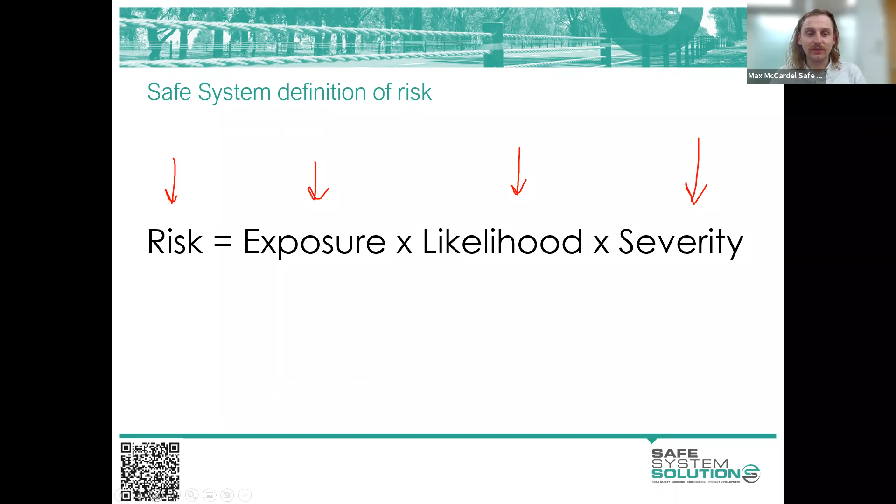And also the geometry, which Rosie touched on before, where if it's like a T intersection like that, that is not a favorable crash angle, where it's straight into a passenger side or a driver side door. If we're able to make that a more acute angle and get crashes that kind of glance off each other, that would reduce the severity. We've got a few slides here just to run through those different categories. So on the left-hand side, we just got those categories in place.

The first one that we're mentioning here is our exposure to crashes. And in this example here, what we actually have is a road closure. It's a little bit difficult to see, but there's a mound of dirt or earth that has just been placed in the middle of the road, which is obviously stopping any through traffic through that location. Further along there, there's an intersection. So it's removing the exposure at that intersection because there's no longer any traffic at that intersection. It's only one way now. Another example of this type of exposure would be creating a cul-de-sac. So actually terminating a leg before it gets to an intersection, therefore removing that exposure.

Another good example of exposure in the real world or in practice is providing grade separation. So in this example, we have a motorway and an elevated structure. So that's where all your trucks and buses and general traffic are situated. And there's no pedestrian or cyclist facilities. Instead, they have provided an alternative route, which is grade separated, so completely protected and away from general traffic.

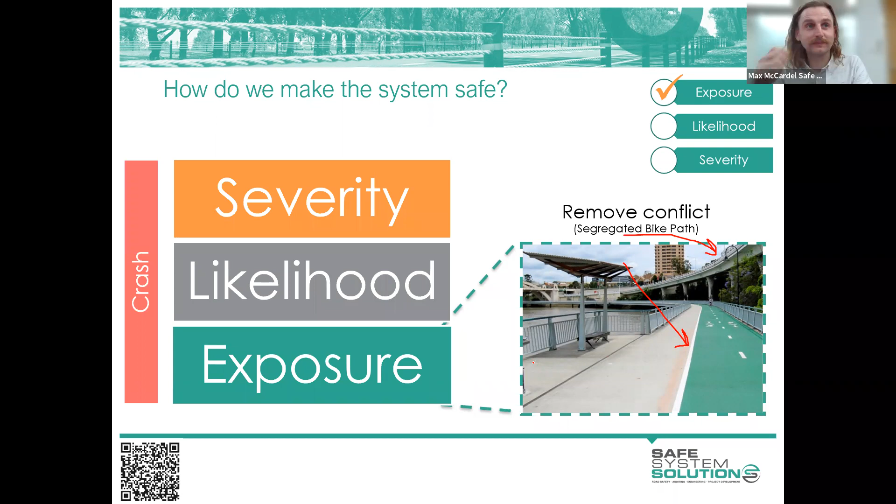While we're on exposure, this is just the definition provided within the Austroads guide. So exposure refers to which road users in what numbers are using the road and thus exposed to a potential crash. I don't know why they make these things so long worded, but measures of exposure include AADT, side road traffic volumes, number of motorcycles, cyclists, pedestrians crossing or walking along the road.

In layman's terms, it's just the units of whichever mode you're looking at there are within a day or within an hour or whatever measure that you're using. So all you're focused on with exposure is volumes, so traffic volumes. Okay?

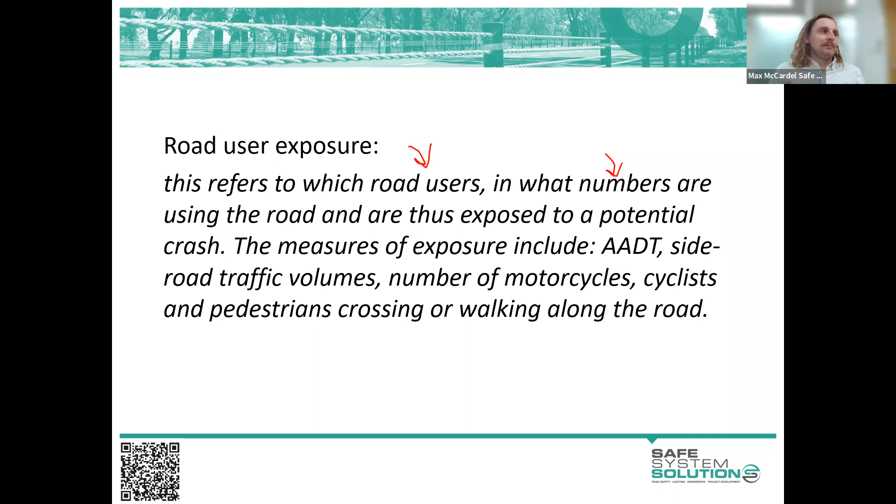Because the Safe System Assessment Framework is relatively new, like it's still being embedded in our various jurisdictions, you will find through application that there are some little intricacies or just some pain points, I suppose you could say, ways that the framework could be interpreted in a few different ways.

Invariably, you'll come across some of these issues, and the guidelines don't necessarily prescribe how to approach that issue. These fact sheets would be a very useful resource for you. So we've provided a link within our learning management system to these fact sheets. So we recommend just downloading them and keeping them until you need them. Particularly with the last assignment that you do, where you will be doing a bit of a mock SSA, these fact sheets may come in handy there.

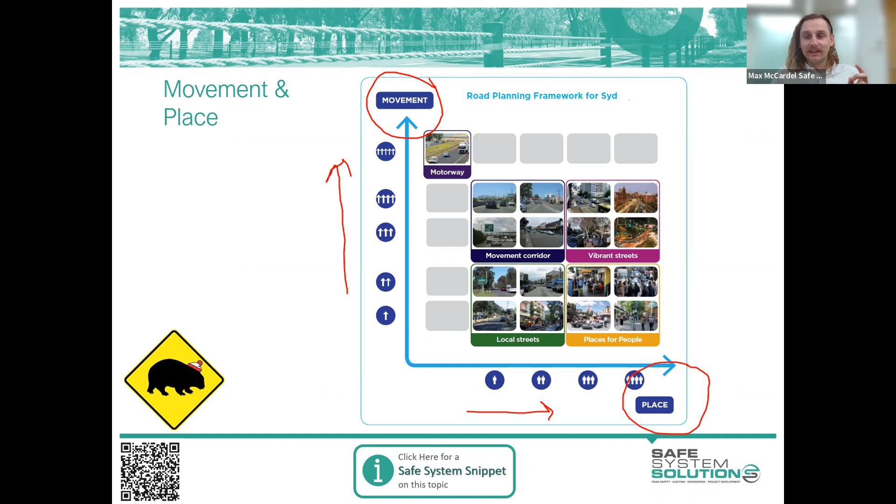So perhaps the clearest one in this entire matrix is where you have no place function and it's all about the movement, is a motorway. Because you don't want people stopping and spending time there and dwelling. That's not the purpose of that road at all. It is solely to get traffic moving. So that one's probably the clearest little classification within this framework, but we'll also look at the other ones, which can get a little bit more open to interpretation and a little bit more challenging to work within.

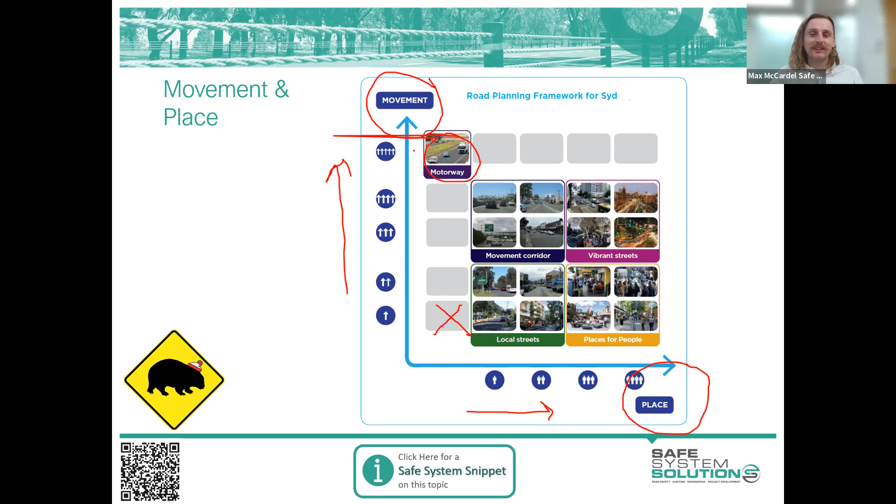So first one we'll get stuck into is this idea of places for people. So this is an area, this is the bottom right hand, where we acknowledge that, okay, the community really valued this place as somewhere that's important to them. Most likely it's going to be CBD districts or high streets, areas where there's lots of pedestrian generators or attractions and things like that. Could be adjacent a railway station, for instance.

And within that same thinking, it serves a low movement function, or rather it's been strategically analyzed as it doesn't need to serve a massive movement function. Maybe that's a better way to phrase it.

So in this space here, we've got lots of place value, not a lot of movement value. And here's an example of what this could look like in the real world, where this is actually a carriageway, but it's a shared area. So pedestrians actually have priority across there. The speed would be 10 kilometers per hour.

And you can tell if you were driving through there, it doesn't feel like that is really a space for vehicles. It doesn't feel like you have the priority within there, which is exactly what you want to communicate. And that's kind of achieved by the use of planter boxes and streetscaping and narrowing the environments and things like that. So there's a whole range of treatments, which we will get into.

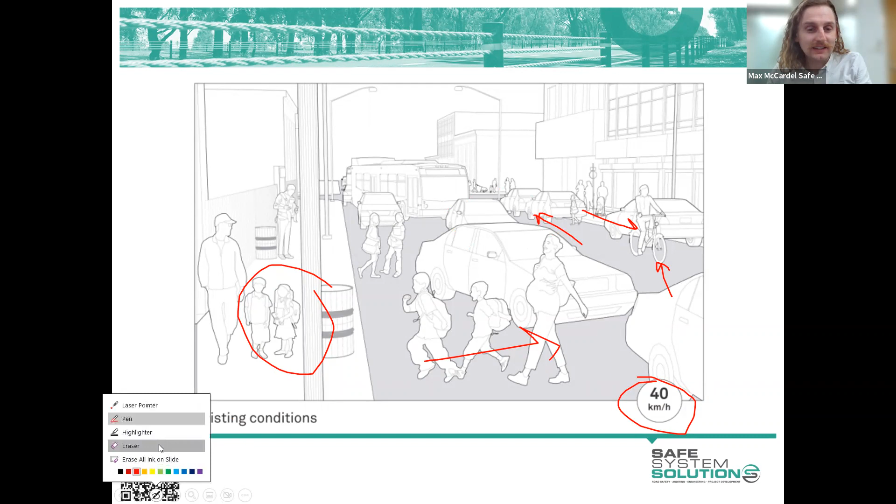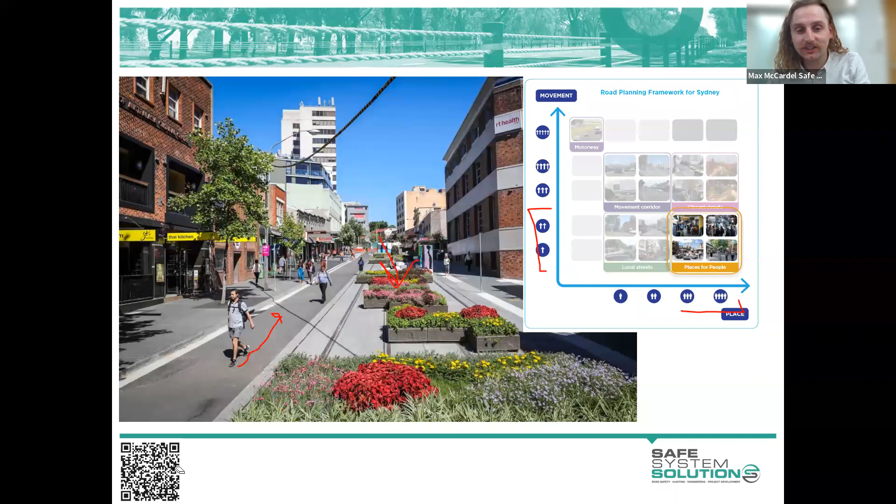And if we wanted to move this existing layout into something that more meets a places for people classification, what type of treatments do you think we could install to achieve that? So before you pop anything in the chat, what I'm after is if you could write in the chat a recommendation or an infrastructure treatment that would make this look more like a place for people, and in brackets, write down whether that would influence the exposure, the likelihood, or the severity. So you should have your treatment, and then in brackets, either an E, an L, or an S. And it could be multiple. It could be L and S, for example.

But I'll spend, let's just say, 3 minutes on this little activity here and give you a go and see what ideas you come up with to make this a more people-friendly place for people.

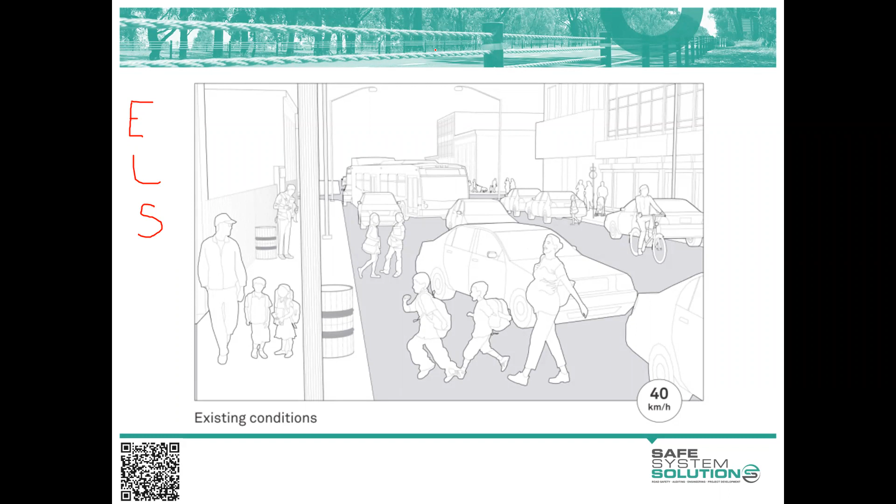All right. I'm seeing lots and lots of wonderful suggestions, so feel free to keep typing them in as I just pick out a few. There's lots of different answers here. First one that caught my eye was very open and just saying reduce vehicle volume with an E. And we give out a prize to Greg there, because I completely agree with that. If we are reducing traffic volumes, we are influencing exposure. So that's bang on. It's 100%.

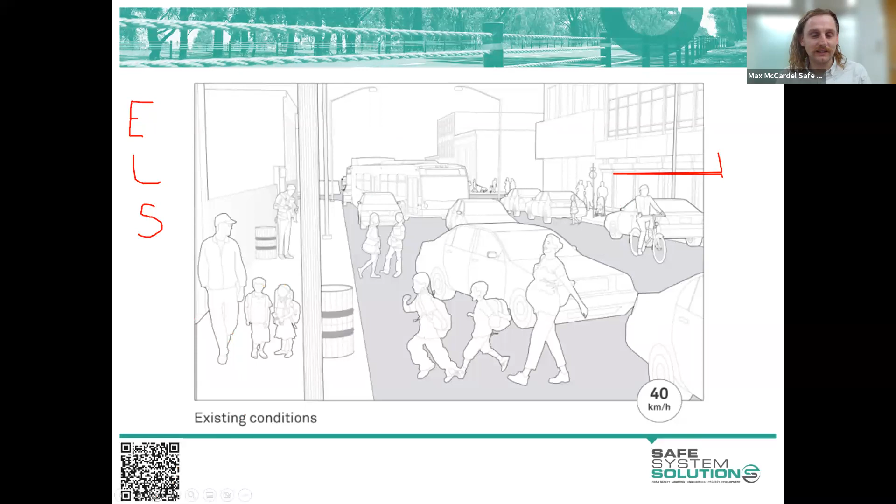The other interesting thing within that space is, that was quite vague as to how you would reduce traffic volume, but I'm just going to take it a step further and say we're going to make this a one-way road instead of two-way. Surely that's going to halve the volumes. And I don't know why the pen does that. Hopefully I can draw this out without it getting too upset at me. Let's say that this was like a block. And previously this used to be two-way, but I'm going to make it one-way.

And if we were just analyzing this road or this site in particular, and we just looked at the exposure, it'd be probably fair to assume that we are going to reduce exposure. We're going to reduce the amount of traffic traveling through there because we haven't got two traffic flows anymore. We've only got one direction. The little caveat I'll say there is it's very likely that you are just pushing the problem elsewhere. So maybe that means more vehicles are using the alternative route, which is adjacent. So maybe there's going to be an induced demand in the next block over, which maybe cannot cater for that extra traffic or doesn't have treatments to support that extra traffic flow.

Which gets into an interesting topic, because in a safe system assessment, when you define your scope, you're saying, I'm only focused on this street here, so this is what I'm worried about. I'm only worried about exposure, likelihood, severity for this street, because that's what I've been tasked with. Within a safe system assessment, it's probably fair to do that with the acknowledgement that you would have to do further investigation to see how that would impact other aspects of the network. Because there's a very real chance that this could have poor safety outcomes for the adjacent block.

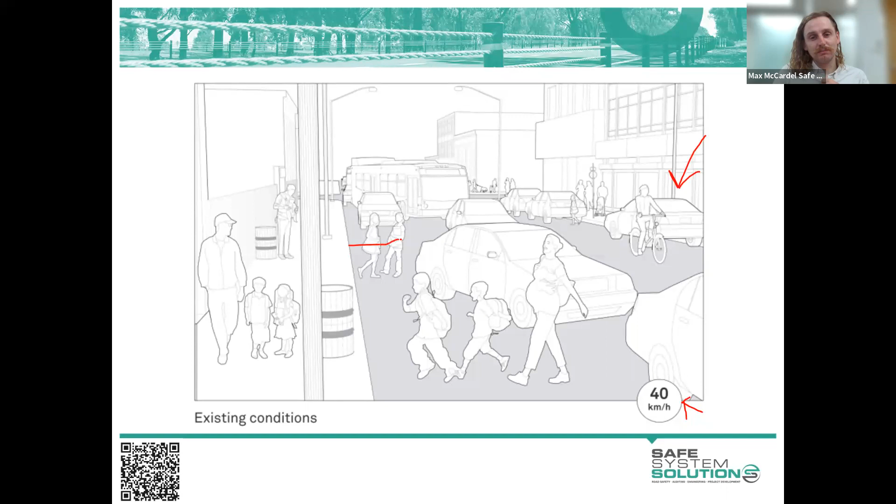And changing parking lanes instead of traffic lanes. Okay, so there's a parking lane on this side. Changing it to a parking lane. Okay, so installing a parking lane, reducing the amount of traffic lanes within that space there. Yeah, I wouldn't refer that to an exposure, because you've probably still got the same amount of vehicles, depending, I guess, how many. I guess if I meant change the entire road to a parking area. Okay, thank you for clarifying. Yeah, certainly. Yep, that would influence exposure then, because it's unlikely you'd have that same throughput of traffic if it just became one giant parking area. I'm not sure you would have hit the criteria for making it a place for people though, if it was just lots and lots of cars here. But theoretically, I understand where you're coming from there.

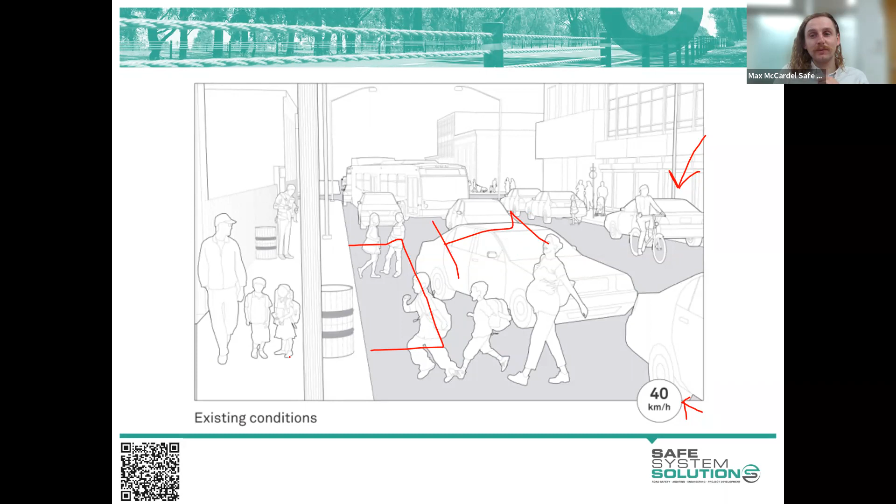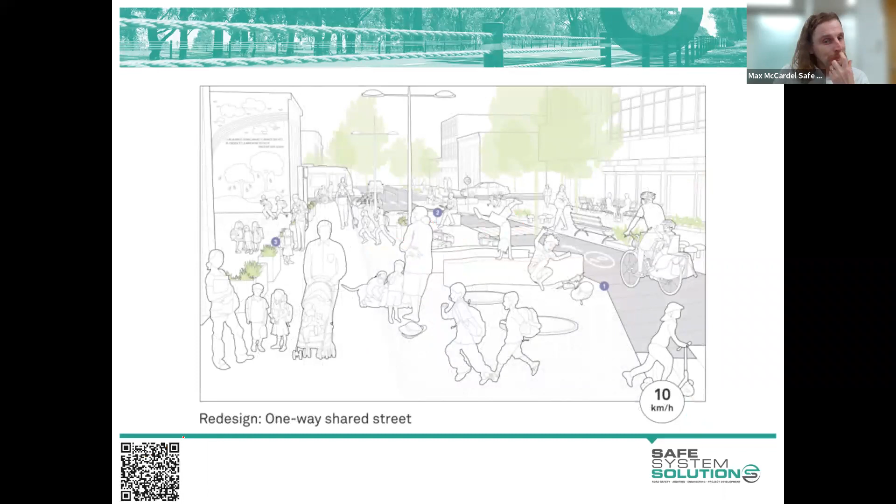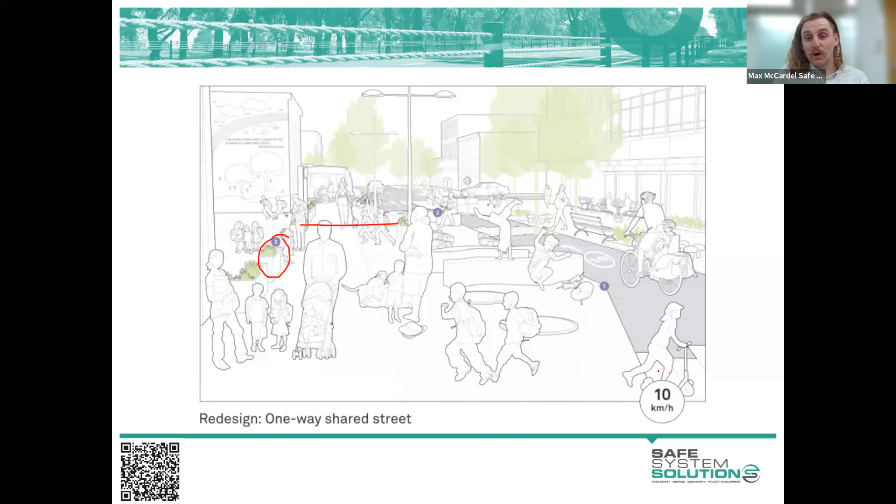But I'll show you an illustration of how this could look if we were to redesign this environment. This one in particular is looking at it more from a pedestrian and cyclist safety perspective. So you can see a lot of those treatments that you touched on, like wide footpaths, have been implemented, streetscaping improvements, lower speed. This has also been redesigned as a one-way shared street.

Another interesting thing, or kind of a bugbear, I suppose: if this was a shared street, what that actually means is pedestrians have priority. That's what the shared entails. So it's no longer just the carriageway belongs to general traffic. Pedestrians and people crossing have the priority at all instances within that shared zone, that shared area.

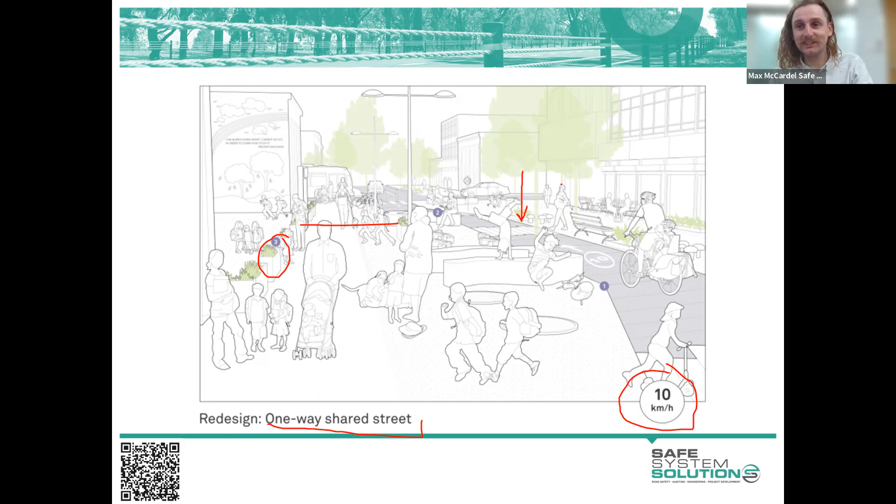So the need to install, a little bit difficult to see, a zebra crossing there is actually redundant, because pedestrians can cross anywhere with priority. They don't need that. This is the spot where you have priority. Anywhere along there would be classified as priority, but that's just a minor bugbear, I suppose.

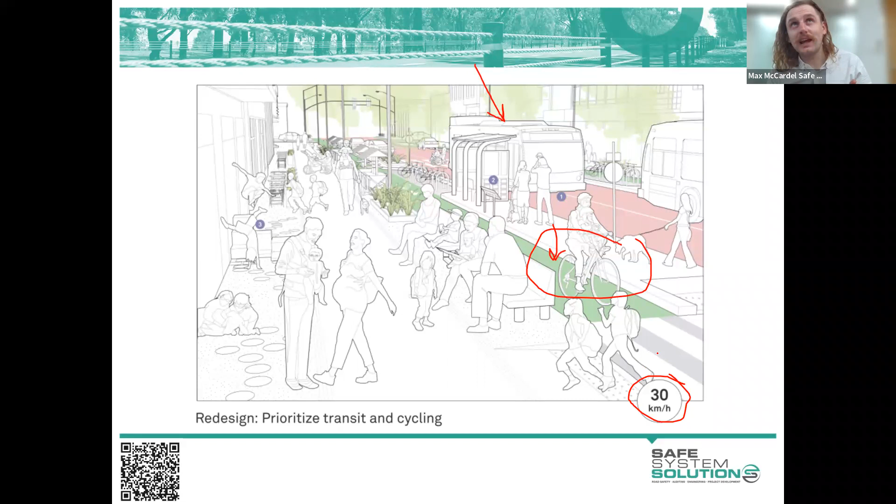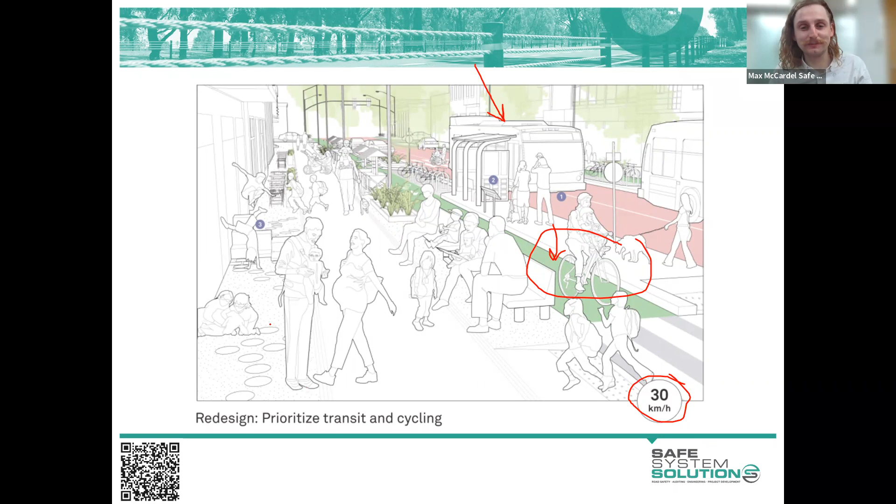In this example, where we actually have bus lanes, very heavy vehicles, we're advocating for separated bicycle lanes. It is at a 30 kilometer per hour mark. 30 is generally accepted as appropriate for cyclists to share the road through the use of sharrows, which we will hop into a little bit later. So it's possible that they could have shared the traffic lane there. However, if there was carriageway width available, we'd certainly be advocating for separated facilities just to further reduce that risk of any collision.

We've got a similar exercise now with another classification within the movement and place framework. This one is local streets. So once again, we don't really have a high movement function. It's not incredibly important that traffic flows remain undisturbed. Similarly, it doesn't hold a lot of place value, and people can get quite upset when you say that their local street doesn't have a lot of place value, but this framework is meant to be interpreted at a statewide level or at a more global level.

So if you think of what a high place function area would be, it's where people congregate in the most mass, which would be your high streets, CBDs, those types of areas. So not really your local streets. Although they might have personal, sentimental place value, as a community as a whole, it's unlikely that our local streets serve that function. So just a heads up there if you ever get in that conversation with anyone from the community.

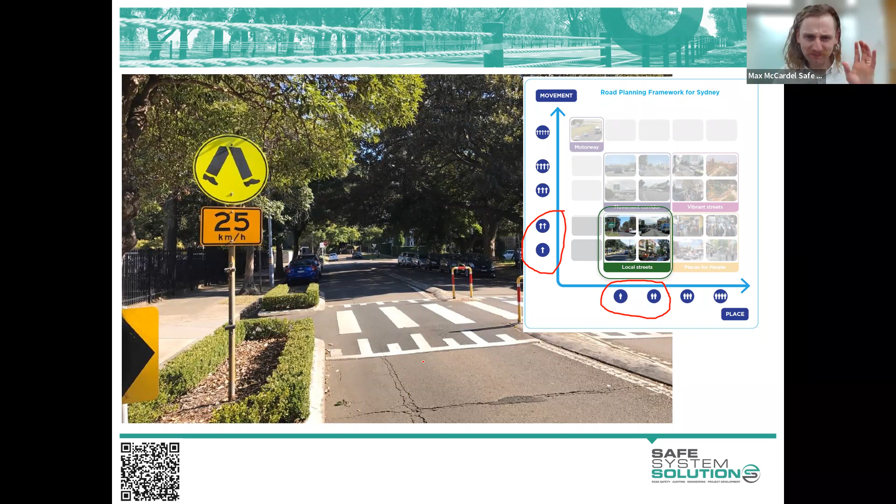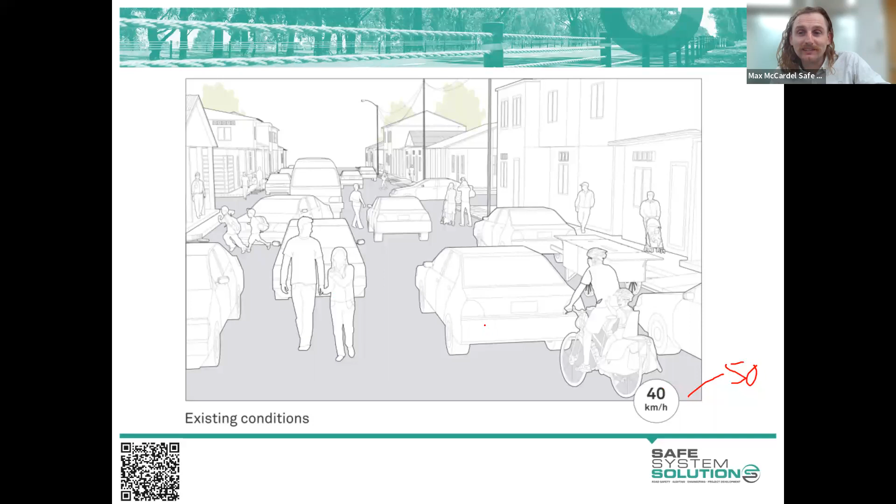But similar exercise: I'll show you a little artist rendition of a pretty common residential street, which would most likely be at 50 kilometers per hour because the urban default would apply. This could be any residential area that you've visited. Generally, this would be the layout. You'd have parking on the sides, a two-way lane arrangement, so one lane each way. Once again, put into the chat any treatment recommendations, with a bracket afterwards to say whether that would influence exposure, likelihood, or severity.

This time I'll give you 5 minutes. My clock says 11:31 is when we'll be back, because I'll give you a chance to have a stretch, maybe grab a cup of tea or whatever. And at the end of the break, we'll get stuck into some of those treatment options.

Welcome back, everyone. Hopefully you managed to get a stretch in. I know I did. Yeah, lots of good responses coming through again. I might just pick out a few, just like I did last time, and have a chat through, but feel free to keep them coming as I'm talking.

So marking a separated bicycle lane is a very interesting one. I've got a slide later on which will perhaps make it clearer, but to me, it reduces the likelihood because you've got separate facilities: a bicycle lane, separation, and then a traffic lane. But I wouldn't say it influences exposure, because only if it's completely off-road and there's never any conflict, which is pretty rare, could you say it influences exposure.

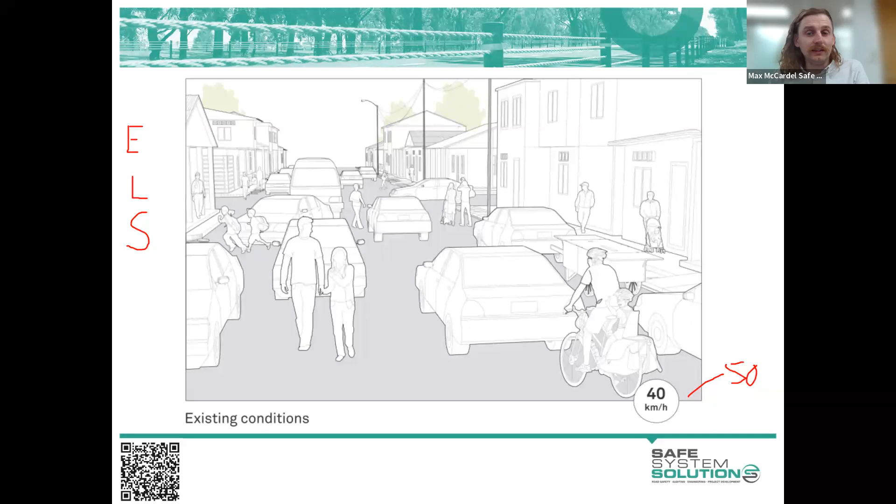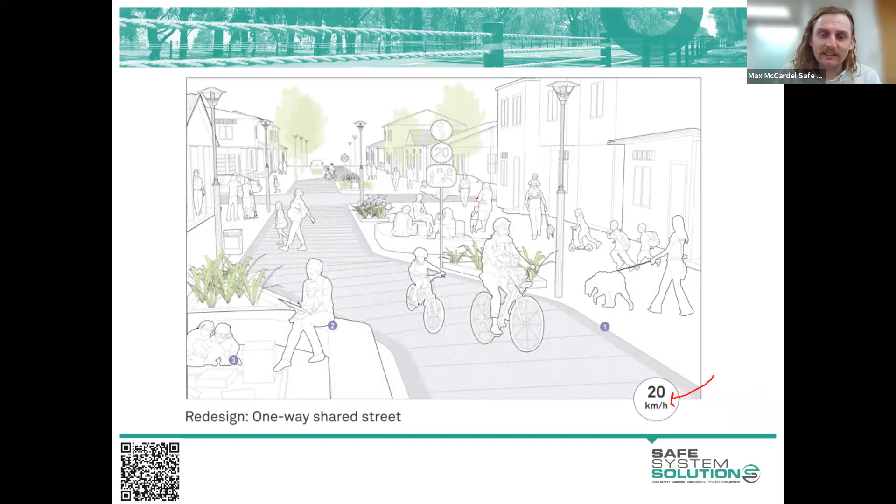So here's just a rendition of how the artists saw this future environment. So you can see they have gone with a one-way shared street. They've also gone for a lower speed zone, 20 kilometers per hour. Another interesting thing about this is, so you've got this geometry change, which was also mentioned, but you can kind of see that horizontal deflection. That's likely going to do a pretty good job at slowing down traffic because they have to slow down to swerve to make that maneuver.

Horizontal geometry is not all that common. We tend to go for vertical geometry within local streets through speed humps. Even in the Miller Street example that we looked at the start, that was through vertical geometry. But this idea of making it a little bit more inconvenient for traffic to get through there is a good way to slow down traffic.

Another interesting thing, because this is in a 20 kilometer per hour zone, the idea that cyclists share the road is generally accepted. So if that was a 40 kilometers, for instance, we'd look at separating those two road users, but because it is lower speeds, that idea of sharing the roadway is deemed acceptable. What else have we got here? Yeah, wider footpaths. We've got things like benches, you know, for streetscaping, more gardening opportunities.

The intersection to me still looks a little bit ill-defined. So that suggestion of a compact roundabout would probably fit in well there, or just any roundabout would probably work within there in that space. But yeah, really good suggestions that have come through. And you can see how all the ideas that you've generated more or less do get captured within these artistic renditions. So you've all got the thinking there. The most critical skill that we're trying to get out of this exercise is the categorization into exposure, likelihood, severity, which we're doing a very good job of as well.

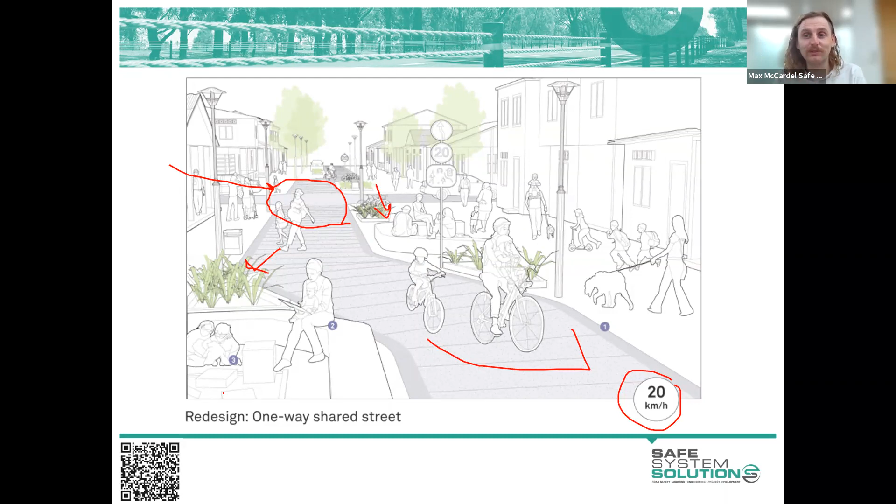So we do have one more of these examples. This last one we might go through a little bit quicker. But it is a very challenging example. So we're still within that space of, I'll show you an artistic rendition and we'll see what treatments we can apply within this. But the strategic background that I'm giving you for this one is, I'm telling you this is very important to keep people moving through here. So we need to get people moved through here.

But it's also a place where people want to hang out. So there could be bars and clubs and, you know, a local footy pitch or something like that along here where people want to dwell and spend time. So we've got those two strong objectives that sometimes work in the opposing direction, but we need to try and work out a solution within this space. Not going to lie, very difficult, very, very challenging.

Sorry, Max, just a quick question in the chat. Yeah. From Ash, when turning a street into a one-way street, does the cost of moving a whole channel of traffic to a new place outweigh the value of the redesign?

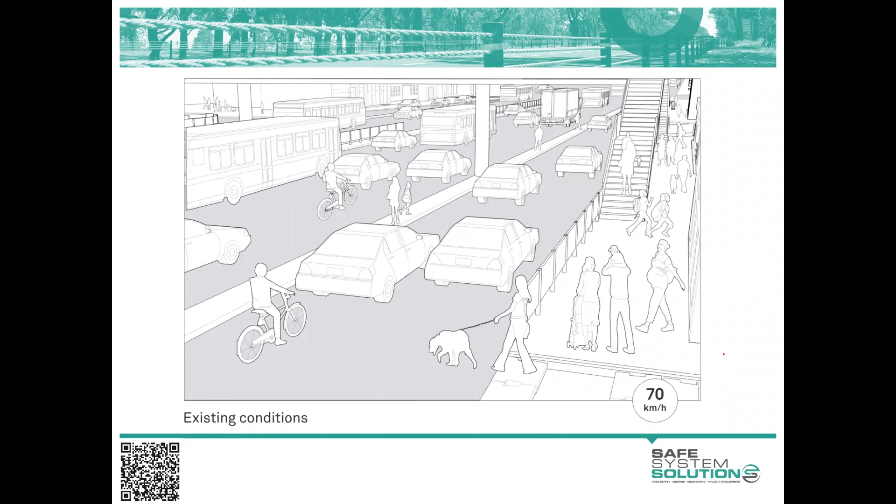Valid question. It would certainly be dependent on the network that you're looking at, project by project, exactly how that would look. The reason I say that is if you were to do that in the residential streets that we looked at before, and there was absolutely no context, it was just a random local street that didn't really connect anywhere, the community would just be like, why was this done here? What's going on? And it's unlikely that that would achieve the benefits that you're after.

However, if there was a strategic reason, so for instance, if north of that road there was a shared area, like a mall, and south of that road there was a train station, and that was one corridor that, although it was a local street, lots and lots of pedestrians and cyclists used to get into the town CBD, you'd have a much better chance of getting that BCR, or benefit cost ratio, above whatever you need it to be in that circumstance, because it actually provides strategic value to reduce speeds there, make it a low-speed zone, and invest money in infrastructure, because our objectives are no longer to support through traffic in both directions. It's more about creating that place for people.

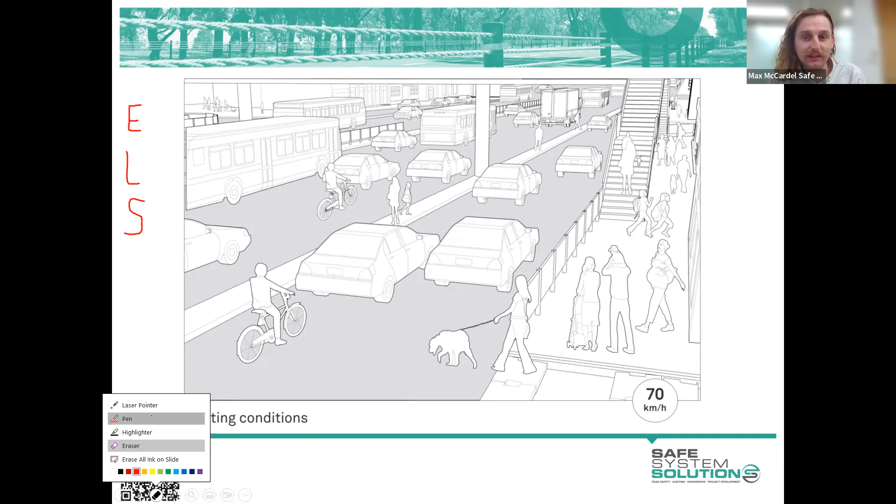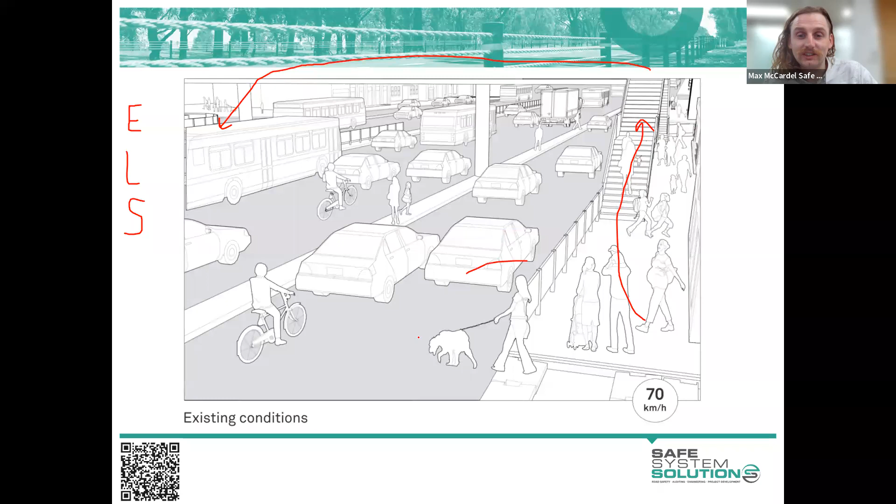Getting lots of suggestions about the pedestrian overpass, which I'm glad people are bringing up because I've got some thoughts on it. In principle, it's a great solution because we're achieving grade separation, so we're influencing exposure. If we're getting pedestrians up here, crossing over the road and coming back down the other side, they don't have to interact with traffic. Perfect. Unfortunately, the practical world does not work as we often hope or imagine. Even in this illustration, you can see a person deciding to cross over there with their dog and people waiting in the middle of these islands to cross the carriageway.

And I think that's something we really need to acknowledge whenever we're doing overpasses, particularly where you've got strong pedestrian demand, like these environments. It's virtually impossible to match the desire lines everywhere along this strip, because there's a whole raft of opportunities where people may want to be crossing. Even if it's 10 meters out of their way to go to the stairs, they may not be bothered. They also may not be bothered to walk up or down the stairs, or they may be physically unable to do that.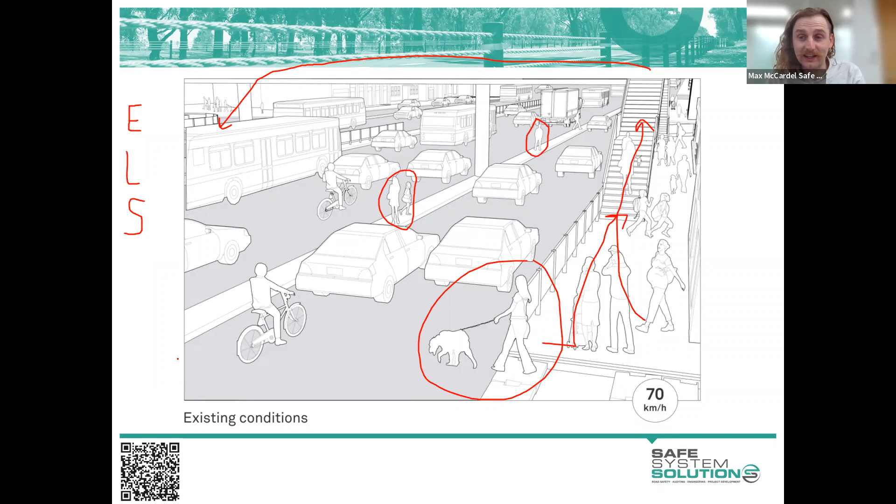They may not want to. You know, there's accessibility issues and concerns that you need to think about as well. So I'm not trying to say that we should never do overpasses. They're wonderful things, but particularly within these urban environments, we just need to acknowledge that a lot of the pedestrian demand will still be to take their chances and just cross over this carriageway.

And some of you may have already made a note about, well, there are these pedestrian fences, and there's also some at the back here, to try and reduce that as a risk. So not to encourage pedestrians crossing over. And once again, an issue that I think we're quite ready to apply, but we should probably consider the context, because if pedestrians want to cross at that location, a fence won't necessarily stop them, particularly if it's a fence at that height. So there's two aspects to that. The first one is, if a pedestrian wants to cross there, a fence isn't going to stop them.

The second one is, if you keep putting up these fences, you're really impacting that place function. It doesn't look like a place you want to be. It feels like you're in a little bit of a tunnel, and everything's not open, and you don't feel like you've got connectivity to the other side of the road where you want to go and visit. You've just got these designated walkways, and that's it. You're limited. So it's got road safety implications, but it's also got placemaking implications as well.

I really went on a tangent with that one today, Kez, but there you go, just some thoughts there. I love this suggestion by Trent. We might give Trent a prize here, about a tunnel for cars. Why not? I didn't give you any feasibility or budget constraints. Let's just bury all general traffic into the ground and head down below, and all pedestrians and cyclists are free to use this land. It's a great suggestion, thinking outside the box.

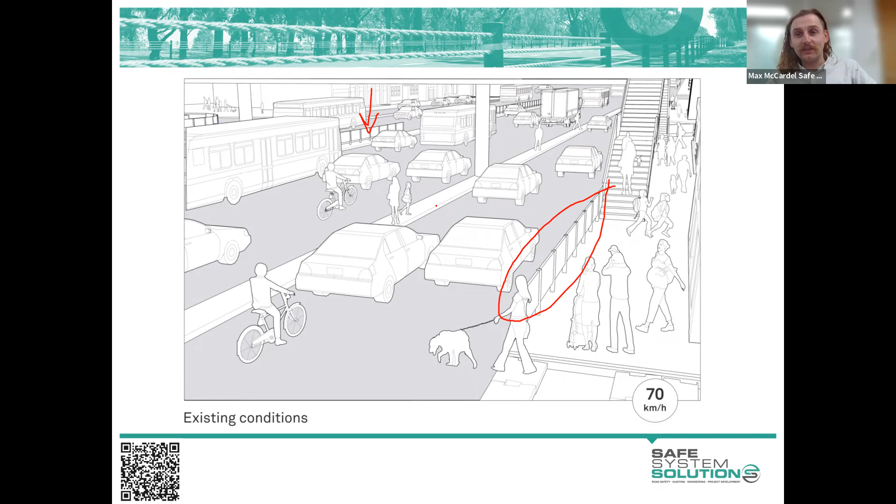Elevated footpaths, cut and cover tunnel for cars. I've got another tunnel there from Greg. Widen footpaths, dedicated bus lanes, shared path next to bus lanes, widen the overpass and providing a lift as well. Very good, thinking about that accessibility. Reducing speed, raised platforms, influencing the likelihood and severity, which I agree with. So well done. We'll hop into how this could look.

And this one's, what I think, quite a clever suggestion, because you can automatically say, all right, well, I haven't got the same amount of traffic lanes there, so I obviously haven't got the same capacity. But this has been strategically done, because what we have now is prioritized bus transit lanes. And as I touched on earlier, when we're looking at the movement and place framework, for movement, it's the movement of people. It's not the movement of passenger vehicles.

So even with a reduction in traffic lanes, if you're getting more people on the bus because they're running every 5 minutes, it's quicker, it's safer, it drops them off exactly where they want, you can obviously get a lot more people on a bus than a passenger vehicle. So you may still be achieving that exact same output in number of people traveling through that area within a much more constrained, confined carriageway. So I think this is a very clever solution that they've opted for here.

The other thing that they've noted here is a separated bicycle path. And this one is called a bi-directional facility, because cyclists can travel in both directions. Commonly, they're just unidirectional, one direction. So cyclists would need to travel into the screen, or would have to travel on the other side of the carriageway. Well, this is the other way around, but you know what I mean. So you'd have two facilities, one in one direction, one in the other direction, following the adjacent traffic flow. But bi-directional is, we just put all cyclists over here, and you can travel in both directions. Although it does look like there's another bi-directional over there, which is a pretty cool feature.

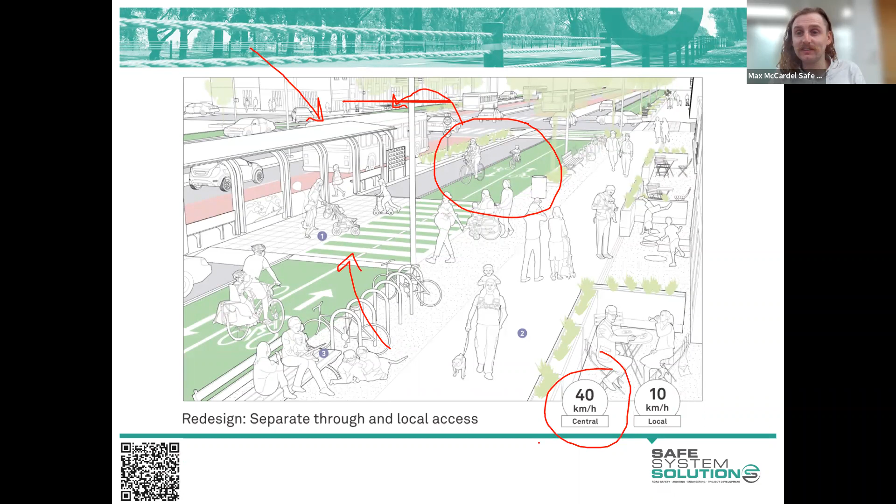We've also got this idea of, once again, speed reductions. It's an inevitable conversation to be had when you're looking at road safety. It's just intrinsically linked, so it's all part and parcel. And this 10-kilometre local, that just refers to this local access. So it's a little bit vague, but it means in the area that isn't classified as that high movement function, in that local area, which is seen off screen, it can reduce the speeds there even further.

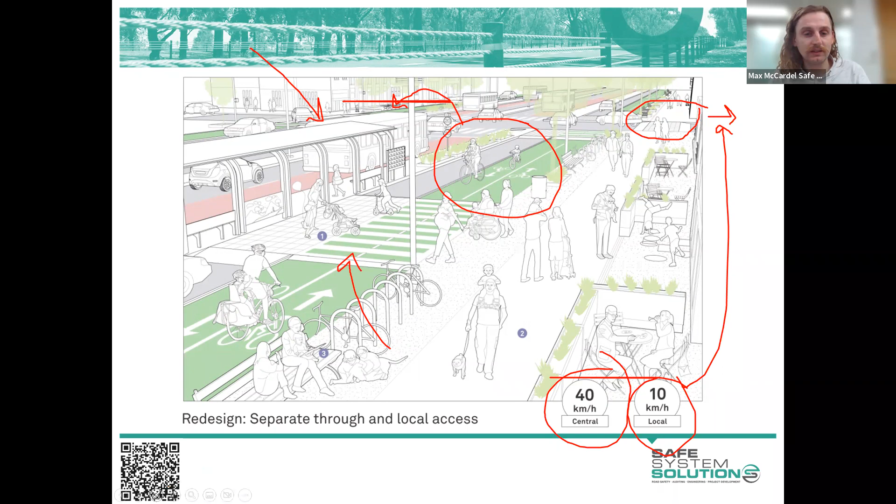Any questions there, Kez? Everyone happy with the analysis done there? Yeah, I think so. I think Chantal just put it last thing. Did anyone say light rail as an option? Yeah, it's a great suggestion, Chantal. I'm not sure if I saw it in there, but absolutely.

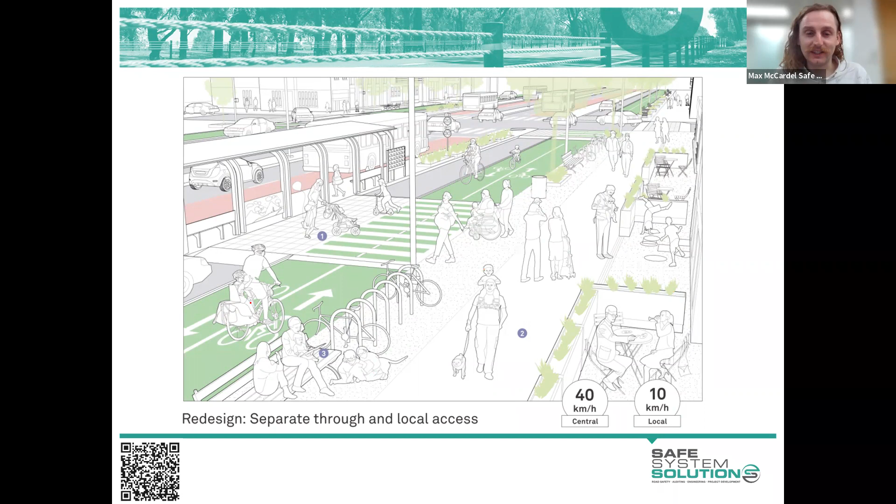While we're in this brainstorming phase, I didn't want to constrain your ideas too much, and I think light rail is just another example of how we can bulk move people without having to build wider and wider, more and more traffic lanes. So definitely a good suggestion. All right.

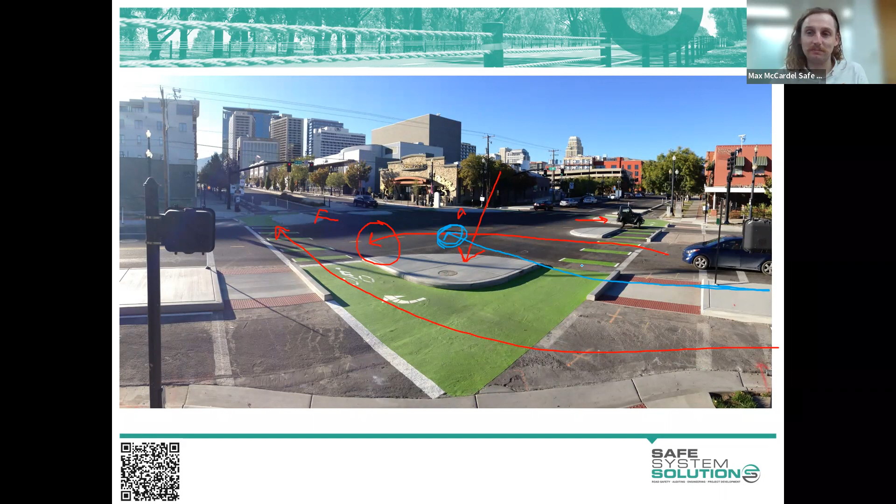The protected intersection deliberately creates this offset, so it creates separation between that left turn lane and the bicycle lane, with the end goal of the left turn vehicle having improved visibility of cyclists crossing in that area. Just got a question there from Greg.

How do you control cyclists heading left and peds crossing? Okay, very, very good question. We'll give out a prize there to Greg, please. Peds. I might stay in the blue one. So let's say a cyclist wanted to turn left at this point here and carry through down here, but there are pedestrians crossing. There is a big vagueness here as to who has priority.

So this one isn't necessarily a great example to demonstrate how you could mitigate that, but what we would recommend and what we've seen installed is actually just a tiny little zebra crossing across the bicycle lane. Generally, zebra crossings are quite well understood. They're pedestrian priority areas. So as the cyclist travels through here, they see a zebra crossing and think, okay, I need to slow down and give way to pedestrians. So that's one way to get through it.

Another thing you could do is create essentially a wombat crossing here, and raise this up, create a little ramp. So cyclists are forced to slow down, similar to what you do on the carriageway, but you could install that across the bicycle lane just to physically slow down cyclists. Very good question, though.

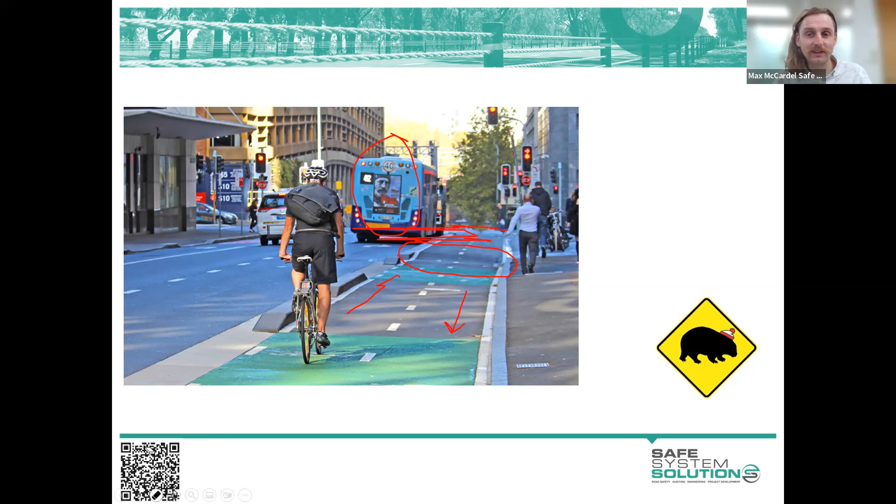All right. The final category within the movement and place framework is the movement corridor. This is where we acknowledge that it's quite important to get movement of people, but the place value isn't quite as significant. So there may be local businesses and industry adjacent to the carriageway, but it's unlikely to be significant volumes of pedestrians and cyclists visiting those places.

So the thing that you're most worried about within our movement corridors, particularly where they intersect with other movement corridors, is managing the speeds at those intersections. So if you've got a high priority arterial road connecting another high priority arterial road, the way that these are treated traditionally is a signalized intersection, and that's it. Just walk away from it.

We've very much come from a place of signalized intersection is the best that we can do, and that's all there is to it. Well, we've moved past that, and we are actually advocating for other interventions, one of which involves raising the intersection. And this is an actual example: this arterial road takes about 10,000 vehicles per day. It's got buses and trucks and a whole raft of users. And it also connects with another major movement corridor.

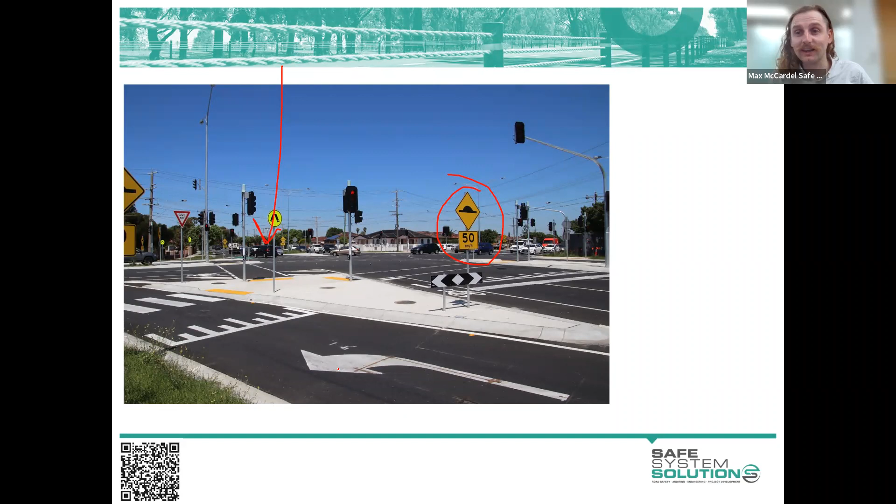Wonderful interventions, because even if a person were distracted, didn't see the oncoming ramp or all the signs, or they were doing a red light run and just not paying attention, whatever the reason, the ramp grade is likely to wipe off a lot of that speed. So say they were traveling at 70 and had no idea it was there. It probably won't take you all the way down to 50, but you're likely to get down to 55 or something like that, just from that vertical deflection.

So that means if you were to crash with someone at that intersection, it would have a much improved crash outcome as opposed to going through at 70. And the reason I say that is because every kilometre per hour reduction in your crash speed has an immense effect on crash outcome severity risk. I think Ken's already talked on this, but it's not a linear relationship. It's not like you go down a little bit in speed, you go down a little bit in crash severity. It's much more curvilinear.

So any tiny little bits of speed reduction actually make a big difference in the severity. So even if you're reducing speeds by 5 kilometers within that intersection, you would see results in the level of trauma that's occurring there. So there are just wonderful things to say about these raised intersections.

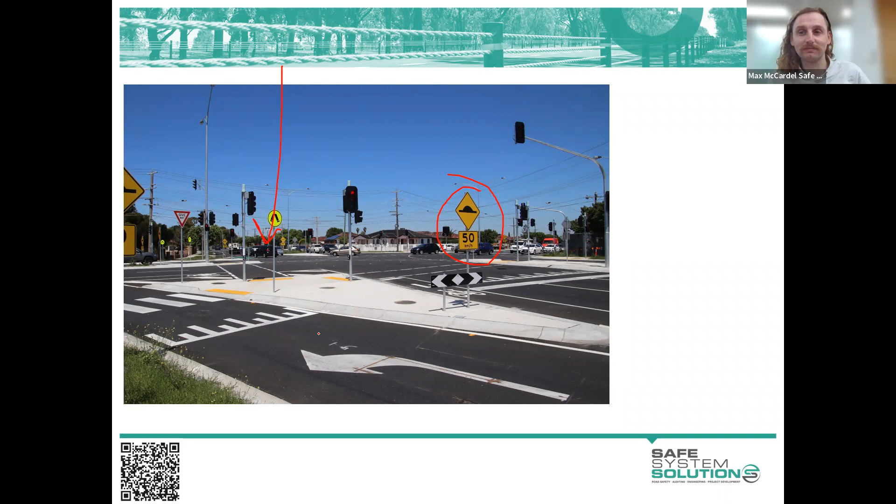Okay, back to cyclists and pedestrians. They're generally considered the most vulnerable of our road users, particularly the young, and even the old are considered more vulnerable, obviously due to their developing or more frail bodies. The young in particular don't have the same cognitive ability to understand the carriageway and understand not running out on the road and things like that. But also the fact that they're so much smaller and lower to the ground makes them more difficult to see. They can be covered by roadside furniture a lot easier.

There's a 10% chance of severe injury where the speed of collision is just 20 kilometers per hour. So we're so far from achieving that, because we're currently advocating that if there's going to be a collision with a pedestrian or a cyclist, we should aim for that 30 kilometer per hour mark, because that relates to fatal injuries. But if we take into consideration severe injuries, so hospitalization, we should be mindful that 20 kilometers or below is actually the impact speed we're after.

But the reason we haven't set that target yet within safe system thinking is because we're just so far away from achieving 30 that trying to tackle 20 would probably be overzealous. It's not a perfect world that we live in, but that's just acknowledging that there are other factors that come into play. So the 30 kilometer fatal injury threshold is the one that's been used to guide a lot of the safe system thinking.

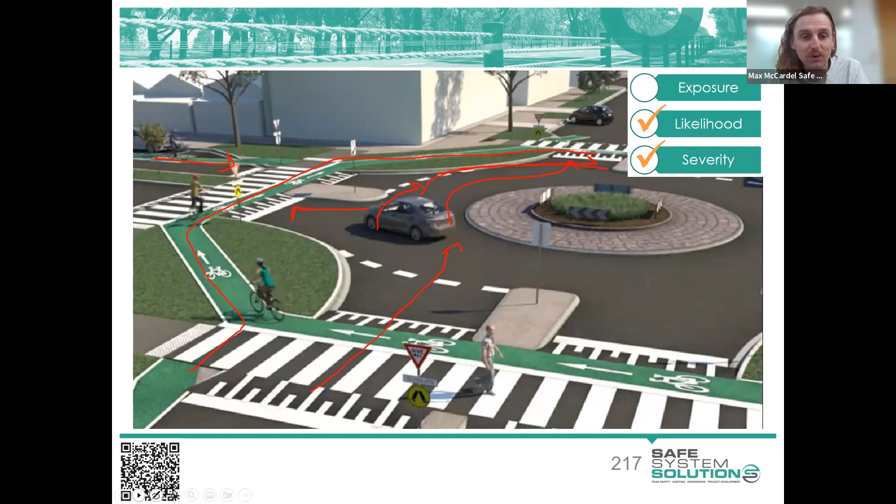But with this type of arrangement, what we actually have is basically an off-road facility for cyclists the whole way around, and they have priority, which means the vehicles exiting the roundabout and vehicles entering the roundabout have to give way to pedestrians and cyclists crossing. So this is a real example. This is just the graphic mock-up, but this is in Moray Street in South Melbourne. I don't know if there's anyone online from TMR, but Queensland have a few of these as well up in Caloundra, in a new development up there, which is very exciting to see.

So I fully expect more of these to be installed because they just offer a greater level of protection for cyclists, particularly for cyclists that don't feel comfortable riding on the road because, for whatever reason, maybe they like being away from general traffic altogether. They don't want to be anywhere near roads. And generally past practice has been like, well, there's nothing we can do at these roundabouts. You have to merge at this point. But this provides a solution where cyclists have priority and, yeah, just a wonderful intervention. The other thing I've got to mention is it's also raised. So once again, just providing that connection.

Albert says the sign says to give way to pedestrians and cyclists. Very well spotted. It does just say to pedestrians. You could probably argue that that little walking man sign says to pedestrians. The panel that I've actually seen is a supplementary panel where it's like a person walking, and then a little bike symbol next to it as well. So anything symbolic, I think, is a better way to do it.

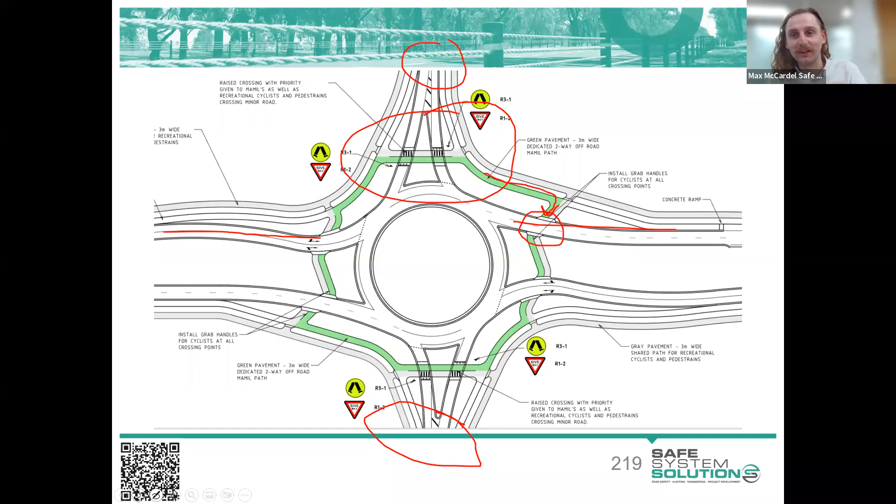But I will also add in the caveat there that if you were to be crossing over a motorway or something like that, grade separation would be much better. It would be a better way to approach that. The Dutch would look at that design and be like, that's wacky. You need to grade separate them.

Anyway, cycling treatments: where we're in the 0 to 30 kilometre per hour range, we generally accept that lane sharing is okay, and that can be supplemented through the use of sharrows, which is just shared arrows. Basically, it communicates to cyclists that you can claim the traffic lane. You're allowed to ride in the middle of the traffic lane because you're just like any other user here. Where you get in between 30 and 70, we really want to start separating the two users. So we want to see separation, similar to those Copenhagen or protected bicycle lanes.

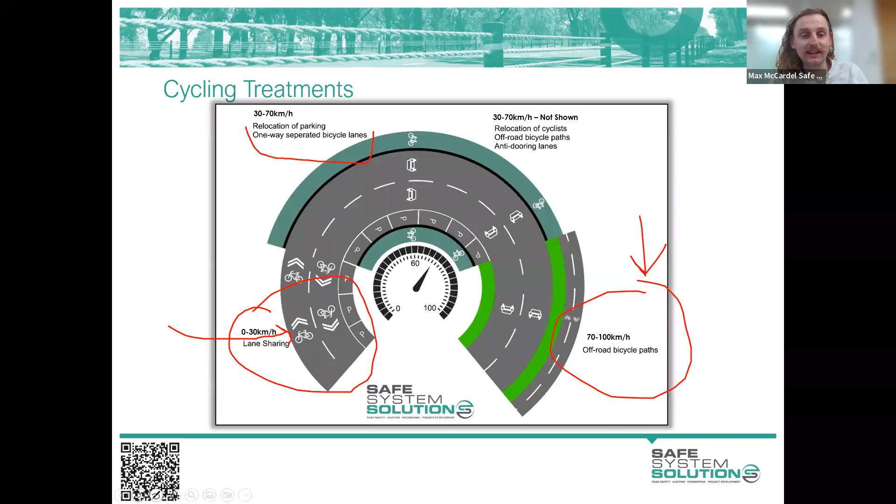The final category between 70 and 100 is where you really want to provide off-road bicycle paths. So you want to have a significant buffer in between general traffic and your bicycle lanes, which admittedly we don't achieve very well within our networks, but that is our aspiration.

Okay, pedestrians. So first thing we'll get stuck into is the wombat crossings, which we know influence both the likelihood and severity. They influence severity because they physically slow down motorists. So if you're slowing down, you've got a speed reduction, that's going to be impacting severity, but also they reduce the likelihood just by raising up pedestrians, and any speed reduction as well will also impact the likelihood. So we generally have the philosophy of, if you've got any zebra crossings or you're proposing any zebra crossings, you should be trying to do what you can to raise them up and create a wombat facility just to provide that extra safety performance for vulnerable road users.

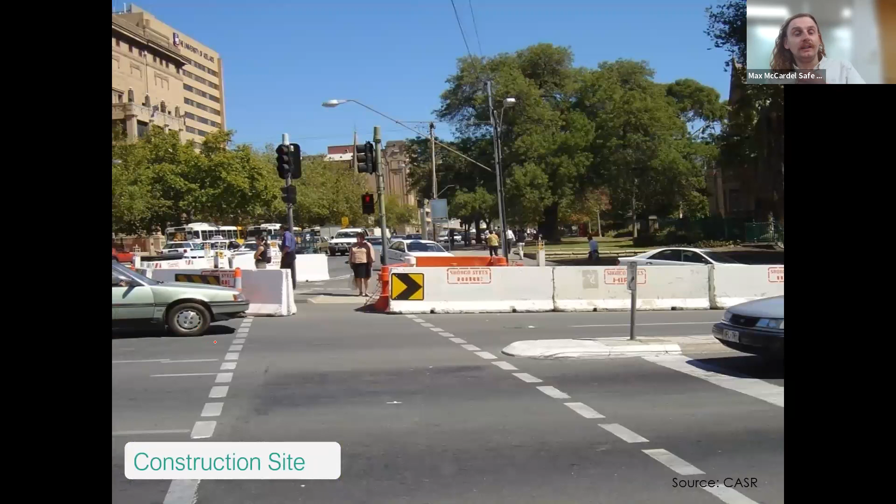This is a site in South Australia. It's the University of Adelaide. There's actually a construction site, and in South Australia, when they have construction on, they reduce the speed limit to 25 kilometres per hour. So just to give you a bit of context, there's a few sparkies or electricians working behind those barriers there, fixing the pedestals or doing something. And before they get out on site, it's acknowledged that while they're working next to a live traffic environment, it's very risky. So we're going to slow the speed, and we're also going to install these physical barriers just to make sure you're looked after.

But the interesting thing is, as soon as the work's done, the barriers disappear and the speed limit is reinstated to 60 kilometres per hour. I could be wrong, could be 50, but much higher speed. And then it kind of makes you ponder. So when we're at work, we acknowledge that our workplace should be free from risk, or at least mitigating risks, and everyone's generally accepting, yeah, we've got to slow down traffic, we've got to install these barriers, of course we do, because we've got to look after the workers.

However, in all other conditions, when it's just general pedestrians trying to cross over this road, it's generally like, good luck. And we don't have those same measures in place. And people may argue, well, those workers, they're focused on their task and they're not paying attention to the local road environment and stuff, which is valid, but you could also argue that for every pedestrian that crosses over, it's unlikely that they're paying full attention to the road around them.

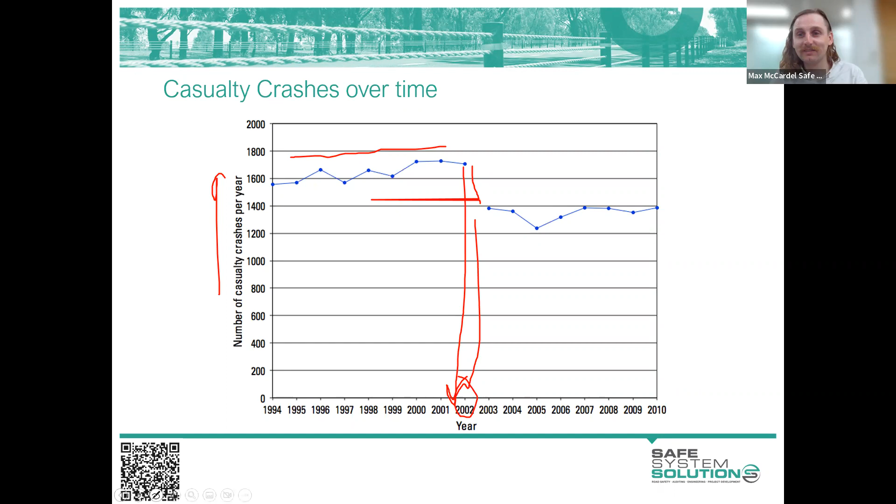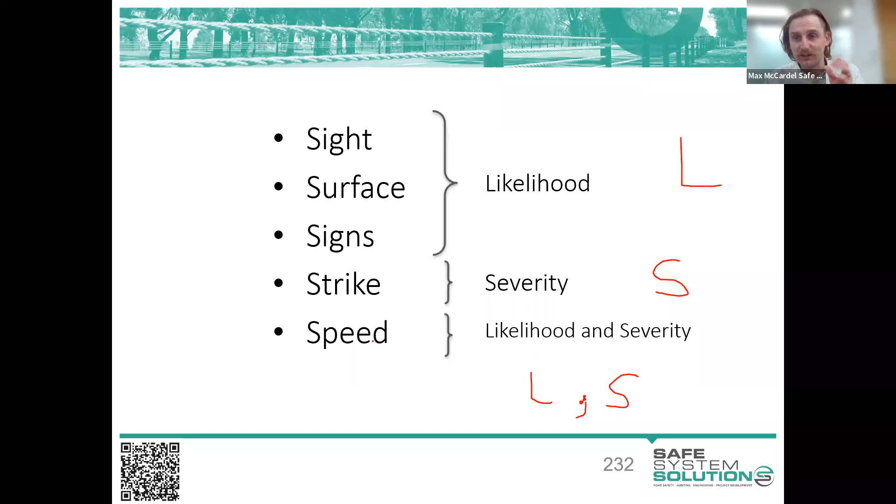But I first wanted to just acknowledge that there is some new literature being developed which suggests that motorcyclists are actually more resilient than we expect. There have been lots and lots of studies of all the motorcycle crashes that have occurred and at what speeds. As I mentioned, within the Safe System Assessment Framework, we lump motorcyclists in with pedestrians and cyclists. So we aim for that 30 kilometre per hour

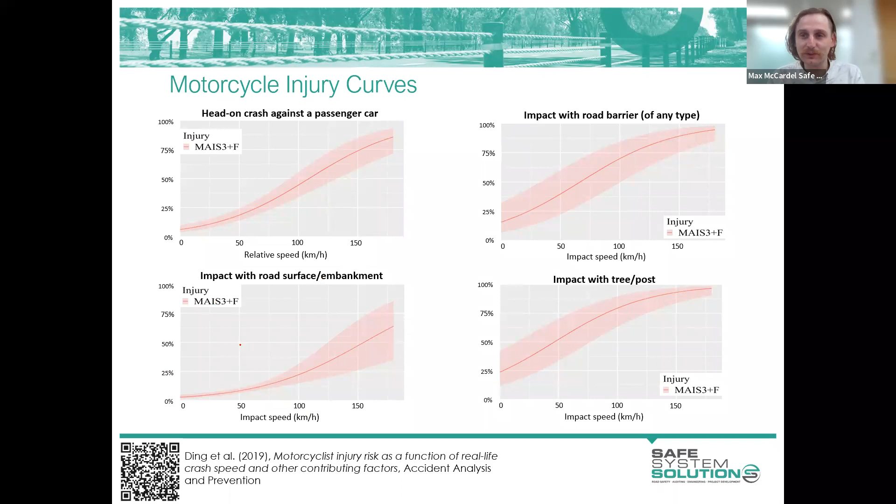conflict speed. However, there is research out there to suggest that maybe that could be a bit higher because motorcyclists do have the leather protection, the helmet, and things like that. But for the purposes of conducting SSAs, current practice is to still use the 30 kilometre per hour crash threshold for motorcyclists. But I just wanted to acknowledge that that work is coinciding.

Motorcyclists are often referred to as the canary in the coal mine when it comes to road surface defects, because if there's anything in the pavement that is untoward or not smooth, they feel it much more than in a passenger vehicle. For 2 reasons: they're on a smaller amount of tread, and also because they're leaning their body over like this, when they are subject to potholes or something like that, it is much more intense. So those kinds of things are really important for motorcycling communities.

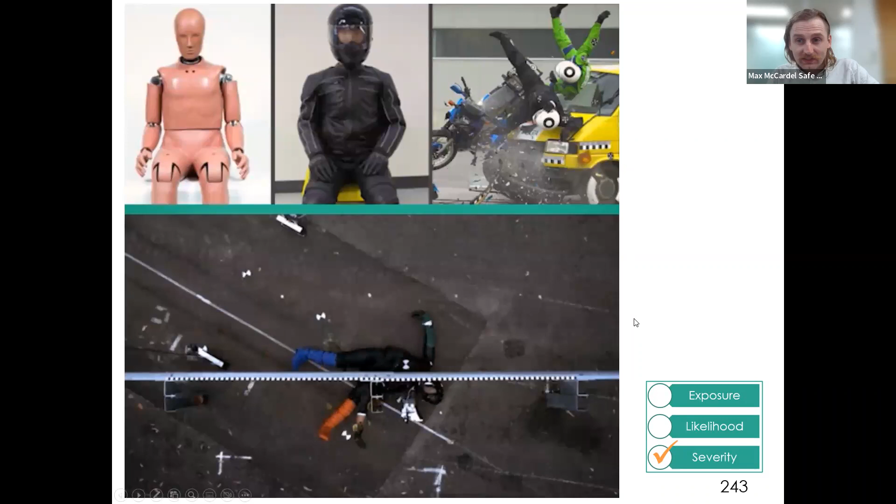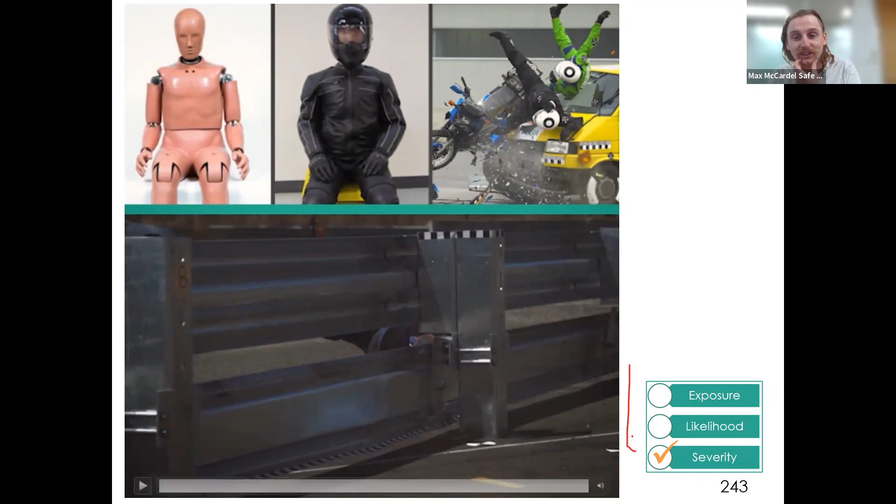The strike: what that refers to is, okay, all of those other measures have been in place, but at this point in time, a cyclist has come off their bike. What are they hitting, how frangible is that item, and how friendly is it to hit that item? I think this is a video. Just check this out. This is a crash test dummy colliding into a guardrail post, and then we have another video of it colliding into an underrun protection, which you can see does a much better job of protecting that dummy. Either situation is not ideal. I wouldn't want to be either of those dummies, that's for sure. But we acknowledge that putting this extra run of barrier underneath the system does, to a degree, reduce the severity. Now, it's no more or less likely, but you've reduced the severity.

And the final one is speed. So just like with all our other treatments we've mentioned, speed has the power to influence our likelihood and severity. Speed signs are incredibly common to display on popular motorcycle routes. And these signs are so important for the motorcycle community. As general traffic, we kind of acknowledge them, and we may reduce our speed to somewhat agree with those signs. However, for motorcyclists, it really helps them gauge and plan their route to ensure that they are hitting corners at appropriate speeds. So something to be mindful of.

We actually have a little quiz at the end of today's, or a poll, Kez, if you wanted to share that with the group. We've got a few minutes left, so we can share that. All right, so it's just jumped up on my screen. Hopefully everyone can see it. True or false? If using a proper helmet and good safety gear, a motorcyclist can be considered as a passenger vehicle / car in safe system crash force tolerances. True, false. Although that actually says flays, so we might need to update that question. Let's give it 10 seconds and then we can end the poll. Right, looks like everyone has nearly participated, but I might just close the poll there and share the results with everyone.